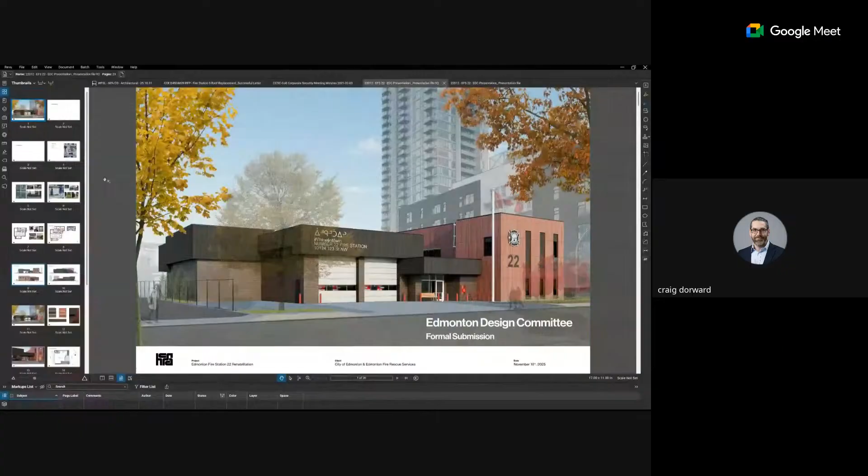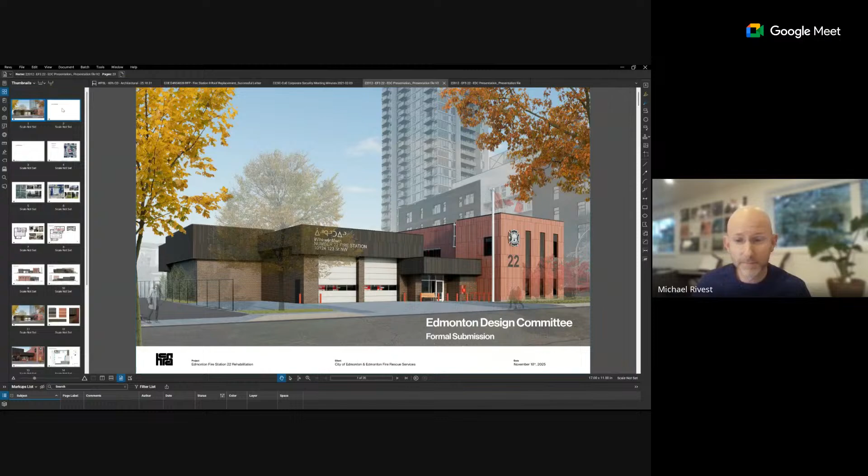Okay, I'm going to share my screen. Please let me know if you're able to see it. Yep, looks good. Is it okay — every time I go full screen, I'm just going to share it like this, if that's okay. Is it legible to everyone? Yeah, that works. Excellent. I'd like to start with the land acknowledgement.

Our project site is located in Treaty 6 territory, the traditional lands of diverse First Nations, including the Nehiyaw, the Dene, the Nakota Sioux, the Anishinaabe, and the Niisitapi, and within the Métis homelands of the North Saskatchewan River Territory. These lands have long been places of gathering, ceremony, and community for many nations. We strive to continue the legacy of stewardship that has fostered this land since time immemorial.

So we wanted to just pause for a second. We typically always try to provide two submissions to EDC, the informal and formal. In this case, due to the project scope, which I'll explain in more detail, we were so focused on the interior of the building, aligning the rehab of Fire Station 22 with meeting Edmonton Fire Rescue Services' current functional program, that we didn't have that many options for the building addition we're going to present. So we made a decision as a project team to bypass the non-mandatory informal submission and proceed to this formal submission. We feel it was appropriate in this instance and just wanted to recognize that.

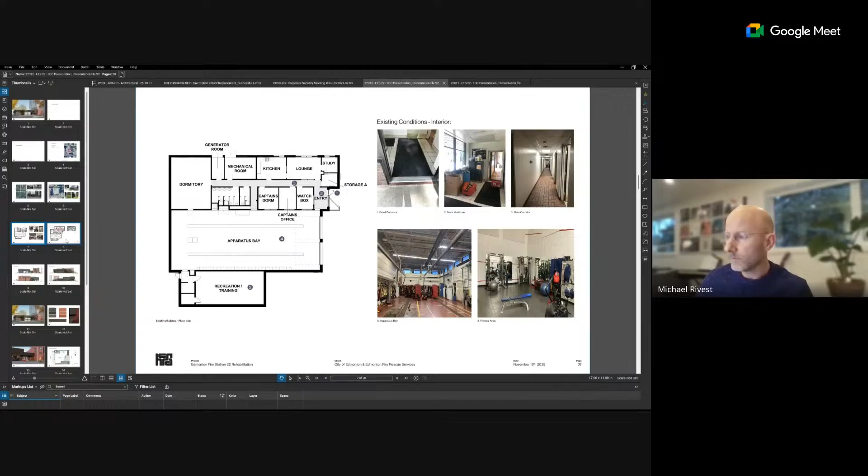So moving to the proposed changes, you can see the duty gear room, and we added a workshop off the apparatus bay to make it function better. The fitness area now has windows onto the outdoor amenity area, which you'll see in the landscape plan. There's an enlarged kitchen and day rooms to meet functional requirements, and a large locker room. One of the really important parts is clear circulation for efficient response times and direct lines of sight for firefighters leaving the core areas and getting into the apparatus bay. The second story component is the dormitories - individual dorm rooms and the captain's dorm room.

You can see our building addition, a 2-story addition on the north side of the site, with the existing building to the south of it. We're proposing fibreC panels on the building addition, as well as recladding the horizontal bands on the existing building. It's a material we felt would be durable and last for decades for the fire station, and also align nicely with the existing brick.

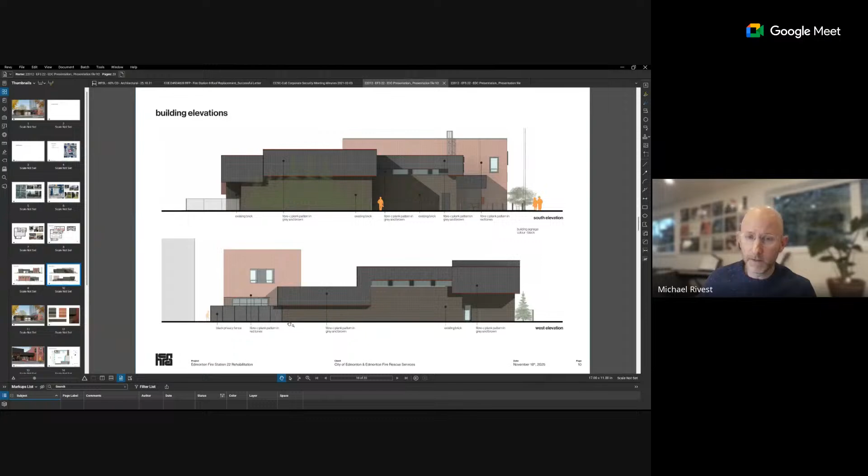We presented a few options to Edmonton Fire Rescue Services, and they really liked having a punch of color, especially red, as a traditional firefighting color. So we played with red tones on the building addition side, whereas we had a more muted approach on the existing building to tie into the existing brown brick.

One of the reasons we picked this fibreC material was it comes in slightly different tones and textures, which we enjoyed on the facade because we really didn't have many options to play with the massing, as this was a floor plan exercise of trying to find the most efficient layout. Playing with these different textures and tones gave a bit of variety on a pretty simple building massing.

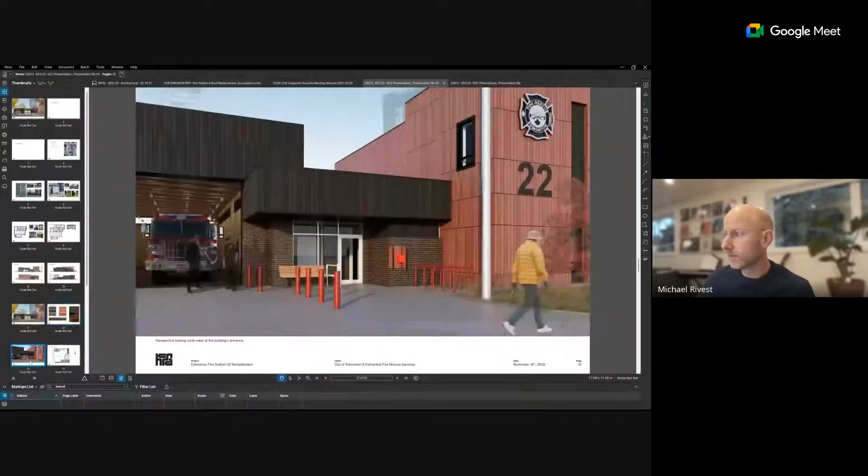Here's just a close-up where you can see some of the 3 different textures and tones on the reds, as well as the 2 grays and 1 brown, with the browns tying into the brown brick.

I'll take us through this landscape and site plan, and then I'll ask Jacob to take us through the planting plan. Starting at the northwest corner of the site, there is the firefighter private amenity area. They have a covered area off of the kitchen where they can barbecue and hang out.

We're still designing this, but the idea is that they would have some privacy from the views to the north, because there's a 7-story residential building getting built there, and the firefighters need peace and quiet when they're in their outdoor amenity area.

The existing shed that they use for their lawnmower and other outdoor supplies, the existing parking that they use for their passenger vehicles, as well as the existing waste enclosure, with proposed planting on the south.

The firefighters do use this area in the southeast corner for parking. The tarmac has to be maintained free of obstacles to ensure efficient response time. The main entry is where we're providing a bench and some bicycle parking.

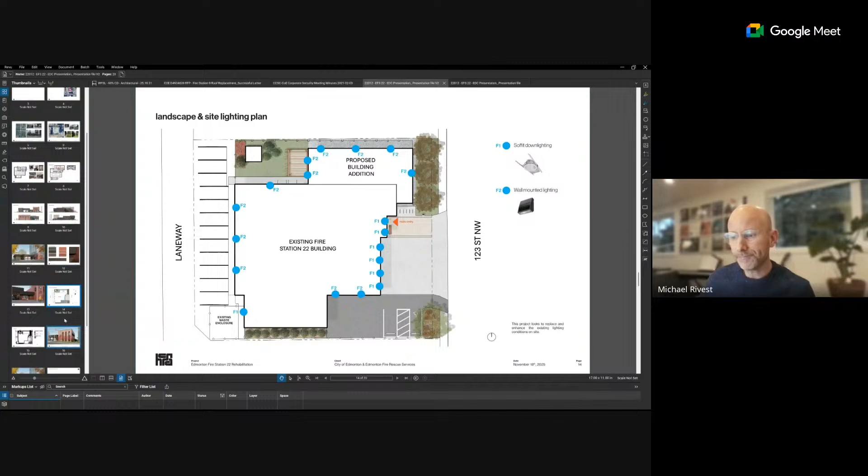Jacob, maybe I'll let you take us through the planting plan.

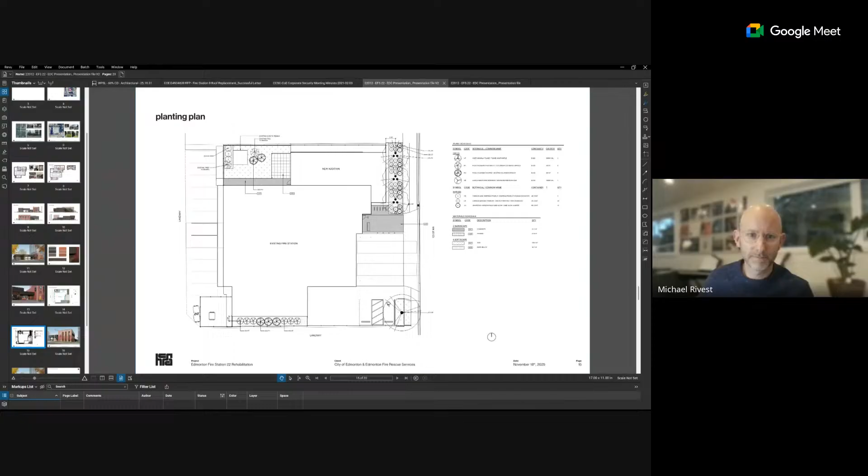With a planting plan, there's always a balance of what's required by the bylaws and also creating visual interest, while doing it in a way that needs reduced maintenance. At the front end, we've got a few maple trees that are hardy and will turn a great red color in the fall. In the back amenity area, there are 2 big coniferous trees that we're maintaining, and we're adding a couple more to increase that privacy buffer we're looking for.

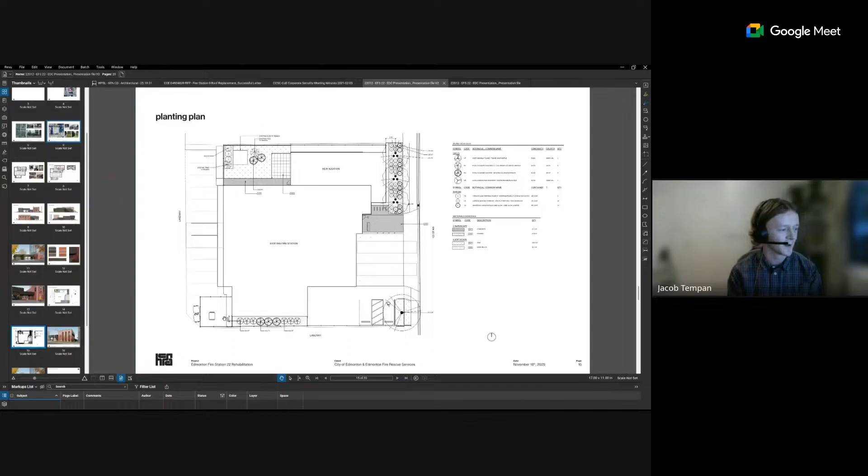On the south face of the building, there are 9 coniferous trees. We're required 15 trees for this development, and this is maybe one of the last places we could put them, so we chose small coniferous trees that won't interfere with the building. Then on the southeast corner, there's a large elm tree, classic Edmonton tree planting, that'll create nice shade along the sidewalk.

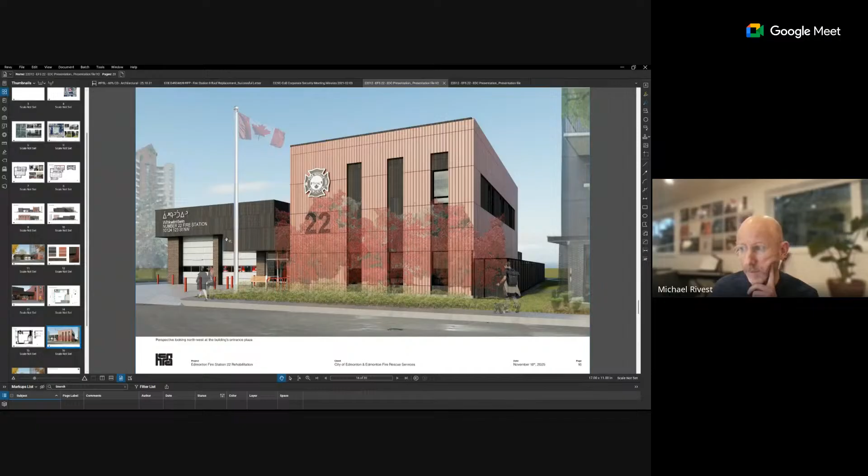Thank you, Jacob. This was just a view from the southeast, looking towards that building addition with the existing building in the background. And that concludes our presentation.

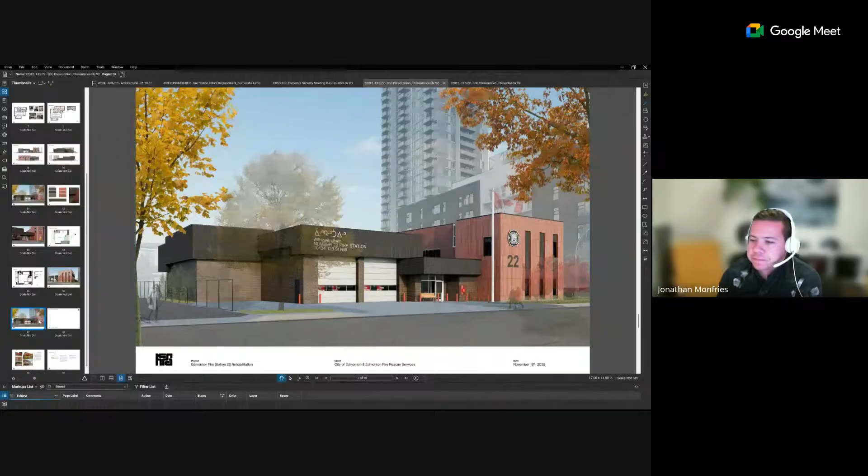Hi, Michael and team. Thanks for your presentation. Similar to Jonathan's comment, I do appreciate the red tone fiber cement color palette. I do think it adds that landmarking presence. I also love how those fibreC panels add another textural element that complements the existing brick. It's something that may not have been achieved if you had used a different durable material like metal panel.

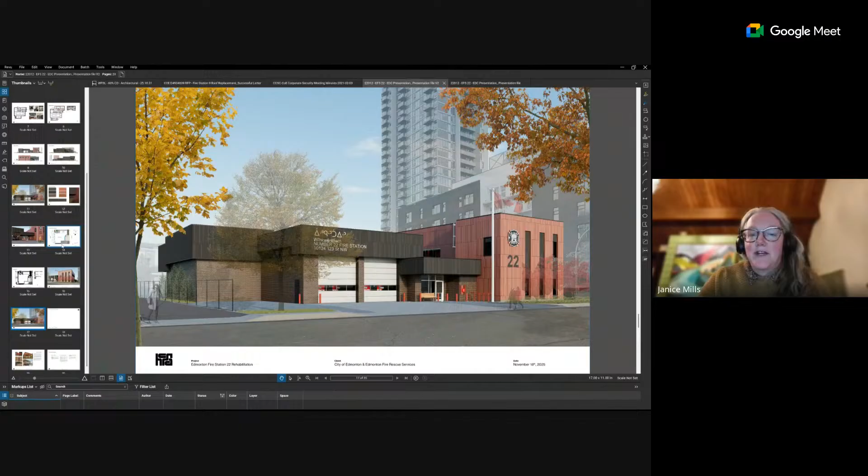One small item that I'd like to put forward for consideration is looking at the overall landscape plan. The accessible parking stall is located adjacent to the curb and softscape area. I would recommend either moving it to the interior stall to allow for improved accessibility on both sides of a vehicle, or providing a clear area on both sides of the vehicle, because there appears to be ample room. Looking at the existing overall site plan, it looks like there was parking adjacent the other direction against the brick wall. I'll leave it to my fellow committee members to comment on whether that empty area in front of that brick wall could potentially be better utilized for softscaping.

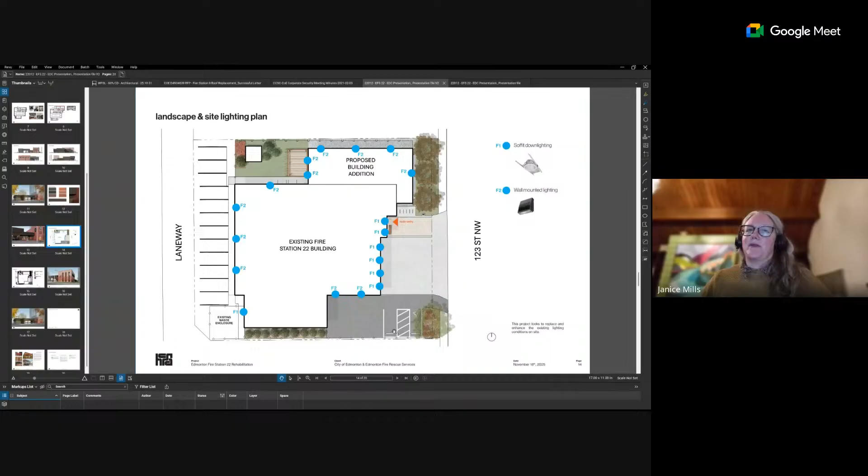So once again, thanks. And sorry, just to clarify, the accessibility, were you trying to get it closer to the entrance? I was just shifting it - either putting the accessible stall to be the interior side stall, or just having room on both sides of the vehicle, or even shifting it down and providing access on both sides. Typically you don't have enough room to do that on a site, and you only provide access on one side, but being you have ample room there, it'd be nice to give the accessible stall the room it deserves. Okay, yeah, fair comments.

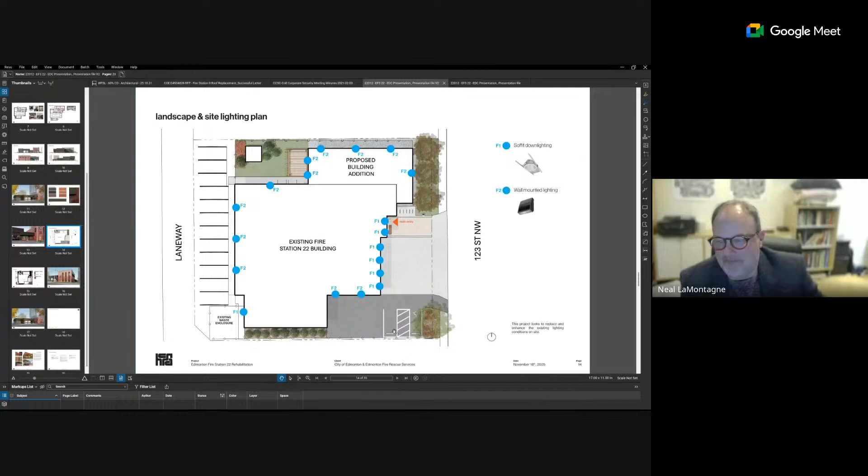Hello Michael and team, thank you for the presentation. The building looks beautiful, I really appreciate how it looks. I only have a few questions, but no nagging issues.

The one question I have is on the south side where you have the barrier-free parking. I don't know whether it still exists - there was a tree to the south of the building according to Google Maps. The asphalt area south of the fire truck apparatus bay and east of the storage area, is there an intended use for all that asphalt? It was there existing - are they planning on parking there, moving a basketball hoop there, or is there a program for that space?

Parking is a premium being a downtown site, so there is often parking used in those locations. It just gives the firefighters a bit of flexibility having that space open.

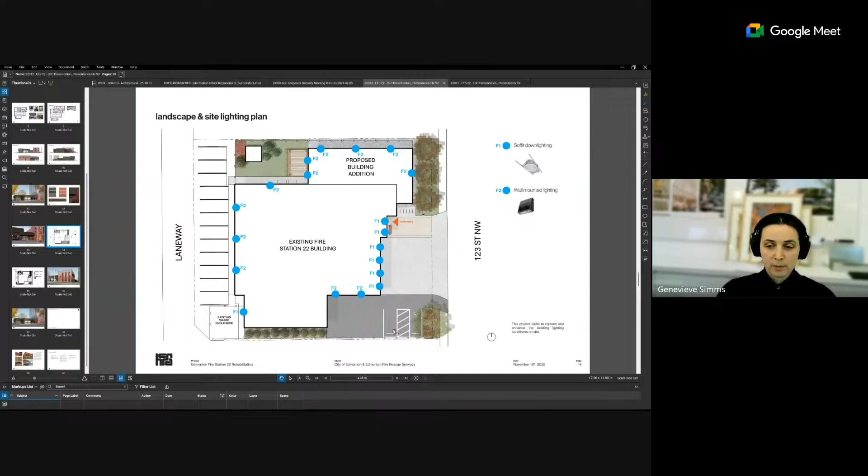Okay, and so the tree is being removed, or is it gone already? Genevieve, I might need to ask you that. Yeah, I can answer that - there was a tree assessment done during our schematic design phase, and the arborist recommended that tree be taken out. It has not yet been taken out; that will only happen after we have an approved development permit application, as per our proposed planting plan.

Okay perfect. The only other question, not a sticking point by any means, is about the window placement or window design strategy for the second floor and the red component of the building. You've got these gorgeous vertical indents with darker fiber cement panels on the east side. Is there any reason that approach wasn't taken for that south side - I think that's the captain's dorm - or on the west side?

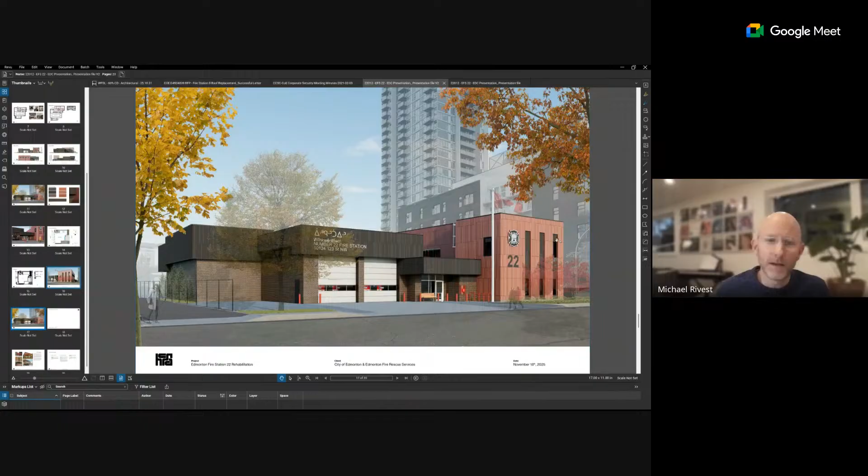So we purposely aligned the east windows. When we were playing with different facade studies, we liked how we were combining them with these darker elements, connecting to the existing building and its dark tones. We're actually adding one more window here to unify that. When we added the one window from the captain's dorm onto the tarmac, we just personally liked it as a single punch. However, we've played with those dark bands - you can see it a bit on the north elevation where we're combining all of the dorm rooms into a single element.

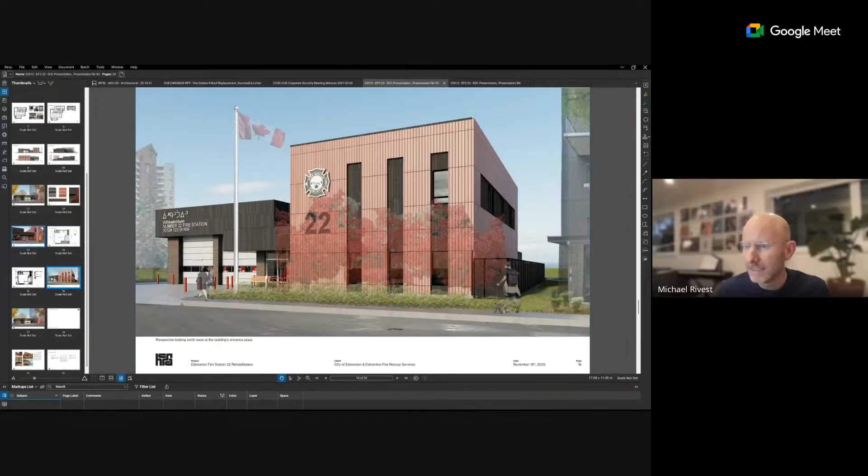Does that answer your question? Yeah, it answers my question - so you've thought about it and made a decision. Yeah, we like one window on its own on the south. Fair enough, thank you for your presentation. That's it, no further comments. Thanks, Greg.

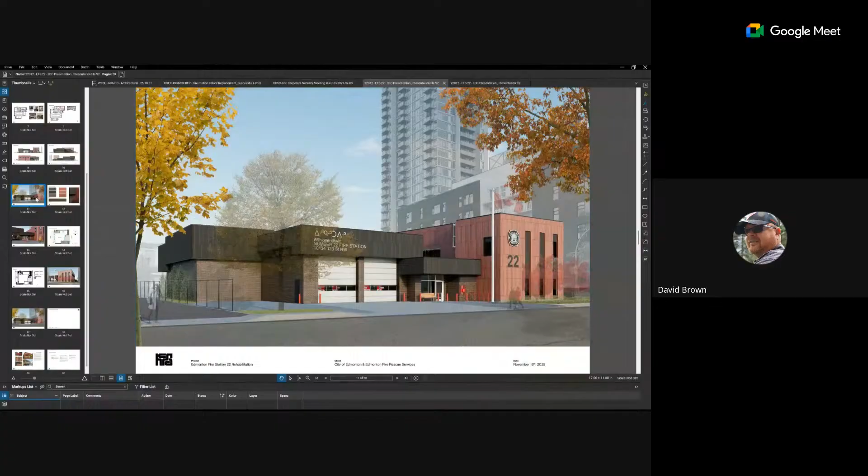I know Janice was talking about that east existing brick facade - for that, was there ever any consideration for maybe a piece of public art on that wall?

We didn't talk public art. A mural came up at one point, and it was decided that wasn't the best use of the project funds.

We did look at signage there. So we have the logo and 22 on the addition here, and we really liked highlighting the new build, the new addition for that. And we were talking about parking earlier.

There are often cars here, so we also didn't want to be like hiding something over there. Mitchel might have a bit more to add to this.

I was just going to speak to that little space there from the previous comment too. Obviously we don't have secured parking in the back of the facility, which is off a pretty busy, high traffic alley. So our members do like to take advantage of these stalls here, especially in the evening and during the day. Especially if we have our ladder truck being serviced, the ramp is quite short, so we can't actually do any ladder checks on that ramp. So they actually like to kind of tuck in there.

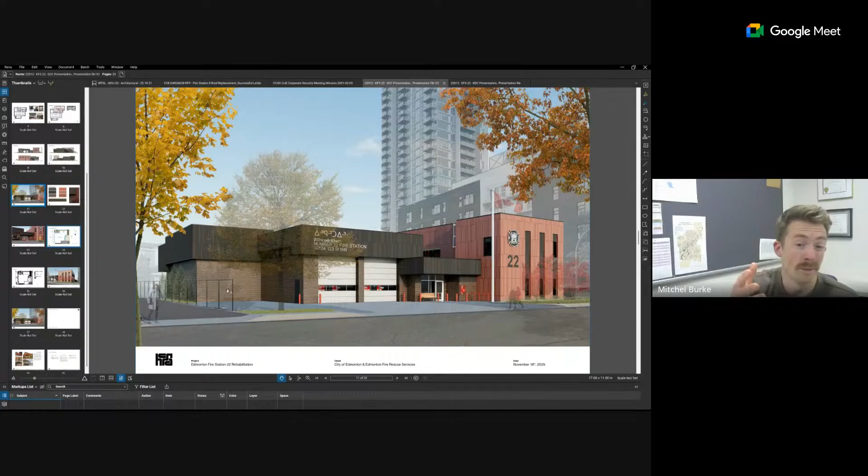So there's a lot of traffic, and it usually blocks the view. It's pretty obscured in there. It's kind of unfortunate because that is sort of a remnant brick wall piece which has no articulation to it and is kind of bland.

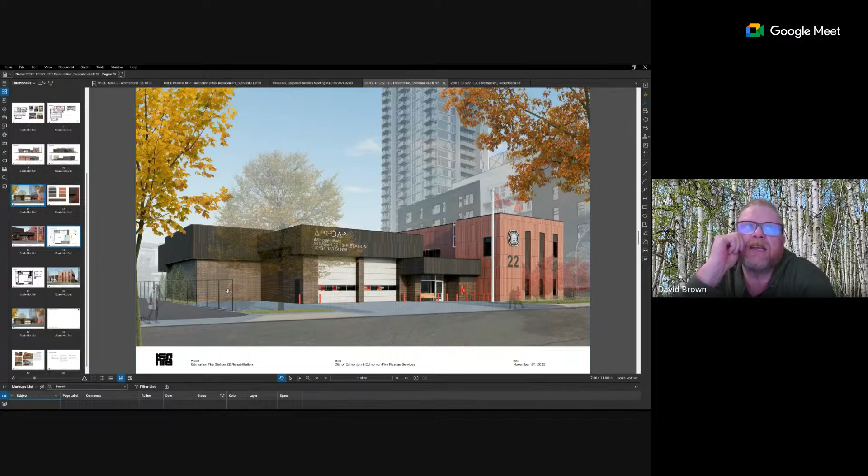The other question I had: any consideration for maybe extending seating, such as a seat wall, maybe incorporating some planters, west to east along the main entrance, rather than using bollards to provide a bit of separation between the main entry and the apparatus bays?

That wasn't brought up. We did provide the bench. That's a standard in Edmonton Fire Rescue Services functional program. And in the reviews, it wasn't flagged that there was a need for more seating off the tarmac.

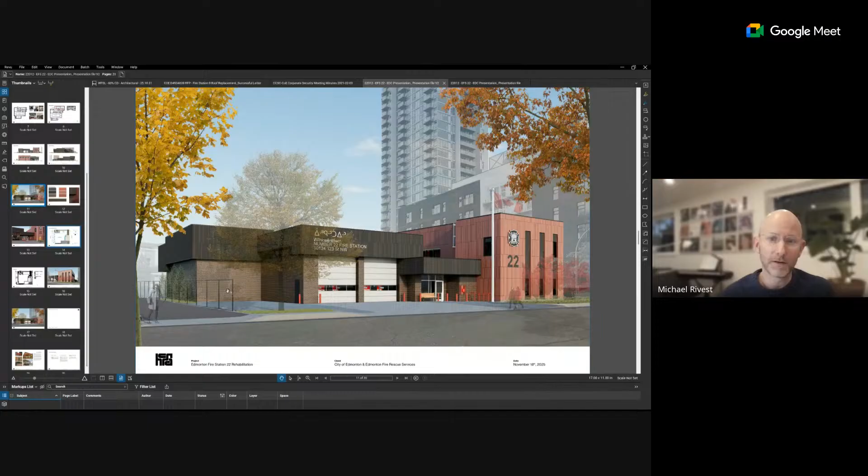I think it might have, rather than just sort of going with that single bench, as I said, it just would have provided a bit more definition to the main entry.

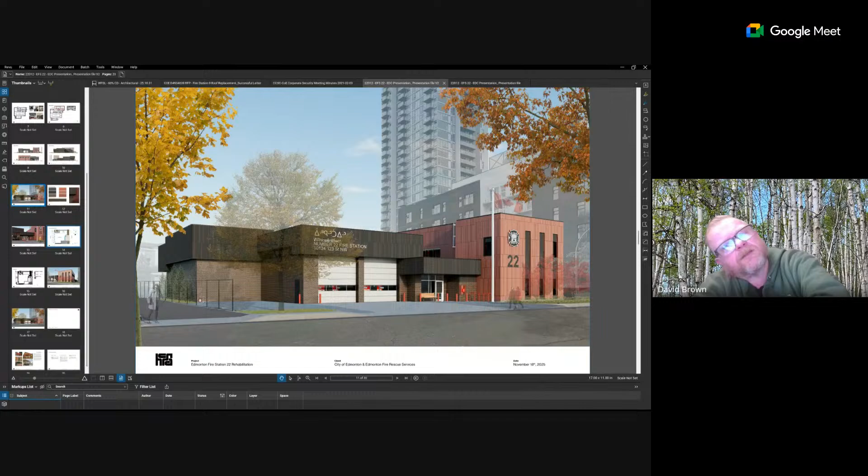Then the other question I had was regarding the outdoor amenity space, which seems to be in a very consistently shady spot. And I know that you mentioned during the presentation that it's still sort of being worked out a little bit, which I appreciate. But I do wonder what aspects of form and function are being considered for that, or were considered for that space.

With respect to the extent and type of hard surface area, or retaining existing trees and proposed planting additions, the size and extent of the shelter, maintaining sod. And the other strange thing was maintaining that existing shed, which really isn't, from what I could see, aesthetically consistent with the architectural upgrades that are being done to the fire hall.

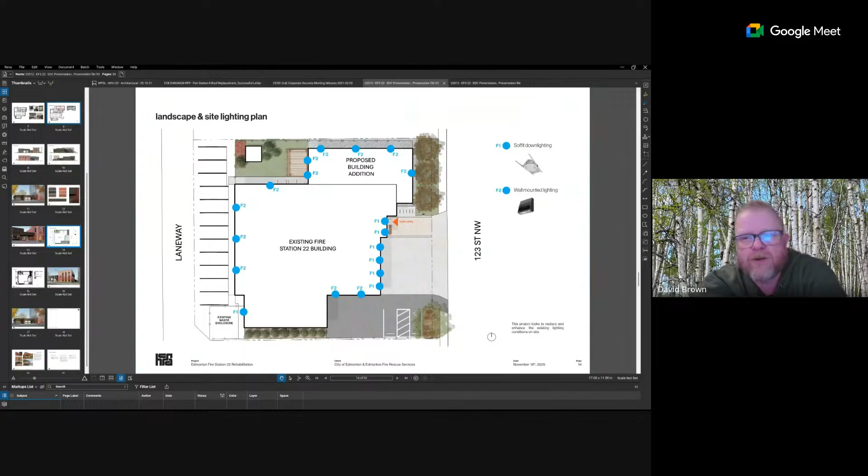So I'm just wondering how form and function is being applied into the design of that space.

Well, as I mentioned in the beginning, the driver for this was the interior floor plan. Tied to that was definitely the recognition that a few key programs need connections to the outdoors, and that's the fitness, especially the fitness and the kitchen area. So that's the reason why these are the two programs facing this outdoor amenity area. And it really led to this footprint of available space for outdoor amenity area.

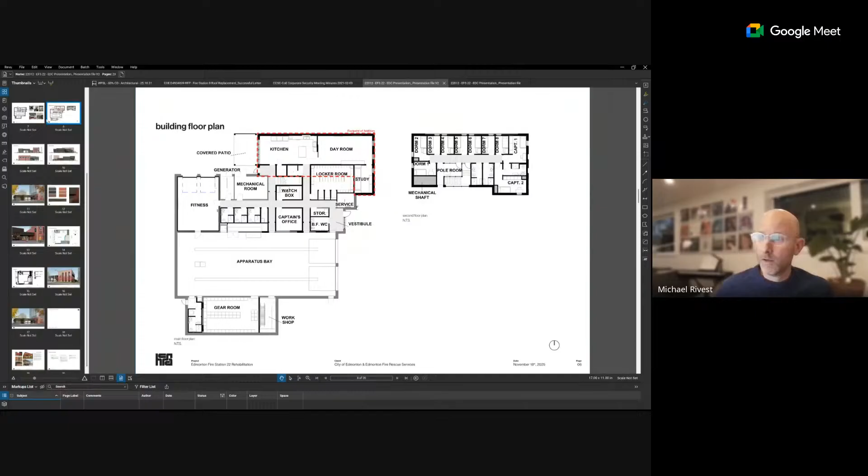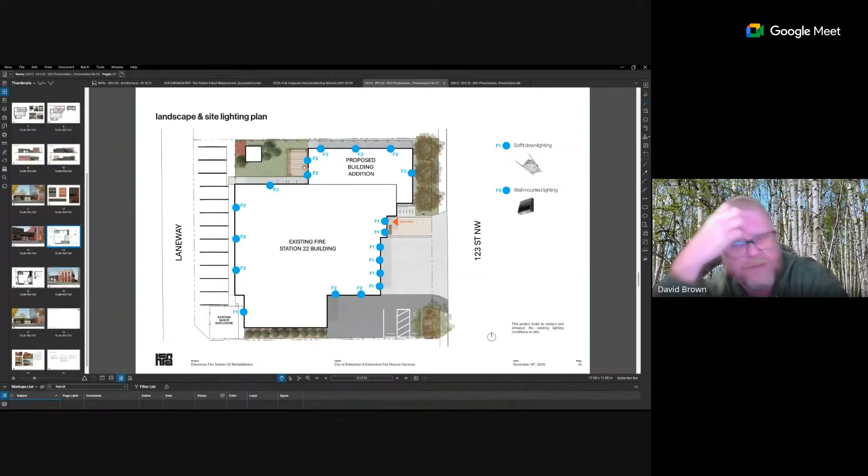I guess where I'm coming from is, if you're extending the kitchen into a sort of an outdoor kitchen space and gathering space, I'm not too sure how many people are in the building at one point in time, what constitutes the number of people that would be in the fire hall at one point in time. But the shelter and the hard surface area seems undersized for creating opportunities for expansion of the kitchen and gathering, and that fitness area as well, and just the extent of grass and the shed.

So I was just trying to get a better understanding of whether a real hard look at the form and function of that space has been completed.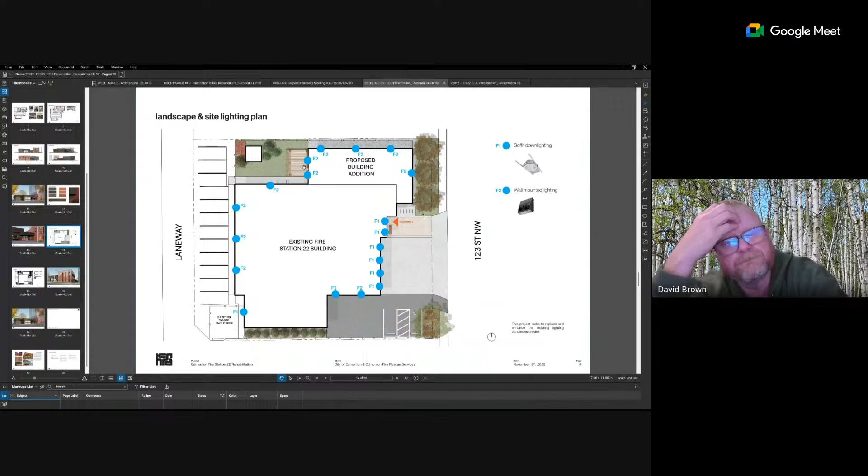Eugene, you put your hand up. Yeah, I just thought it might be helpful to clarify the use of that space. I think it's deceiving maybe to call it an amenity space. It's more of a barbecue area and just a chance to get some fresh air. We're not really anticipating people lounging or hanging out there.

It's just basically access to a barbecue, and we wanted to provide some privacy so that the residents nearby aren't looking down onto it. But that's really the function of it. It's not so much an amenity space. And it's an improvement from what we have now, where we have to go from our kitchen through a hallway, through a mechanical room, through a door to barbecue and back around. So this is actually quite an improvement.

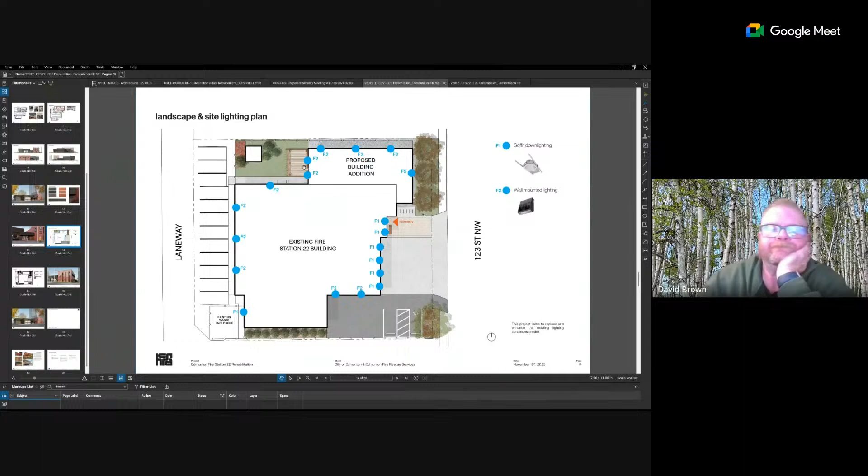Okay, thanks. Thank you, David. Kevin. Sure. Thank you for your presentation, Michael. It's nice to see you and the team.

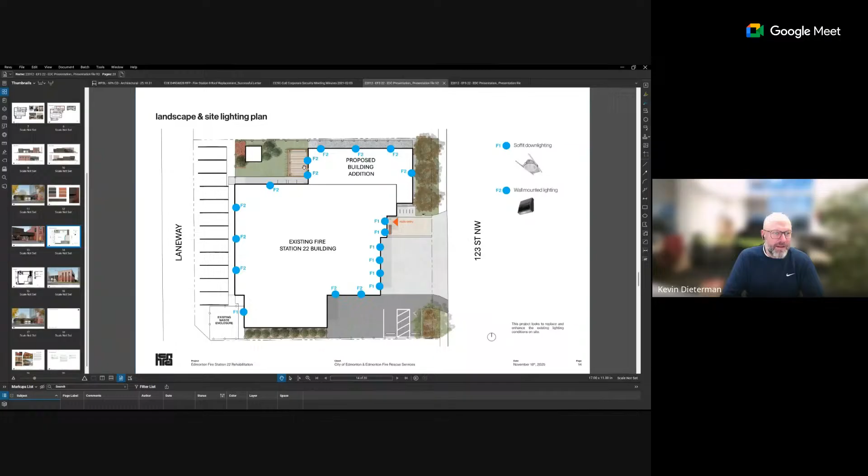I don't think I have any comments that weren't already made. I think it's a lovely addition and obviously an important project for the city and for fire and rescue. So thanks for bringing it. Thanks, Kevin, and nice to see you too. Thank you. Raj.

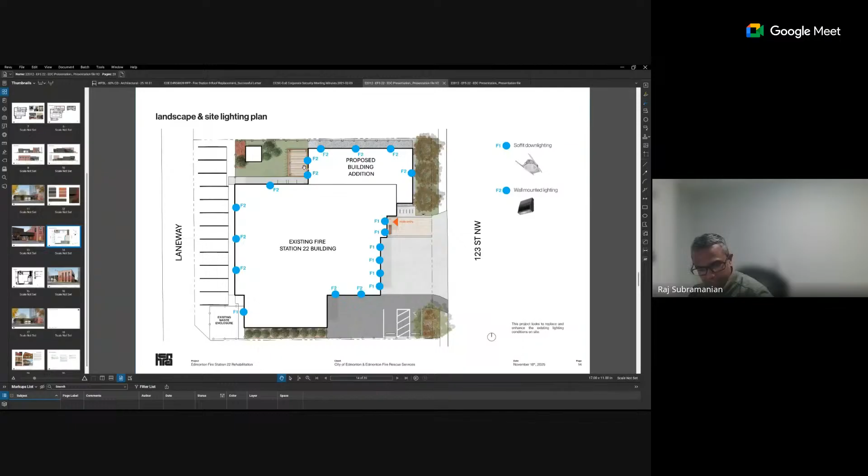No, I don't have any additional comments. I really appreciate the concept here of making use of the existing building and modernizing using the existing footprint. So great work, thank you.

Thank you, that leaves myself. Overall, I have no major comments. I think the material choices on the project are great. I will echo David's comment about the seat wall or kind of planter. I believe there was a small planter there before, if Google Street Maps is correct. That would just be a nice, softer kind of intervention than the bollards.

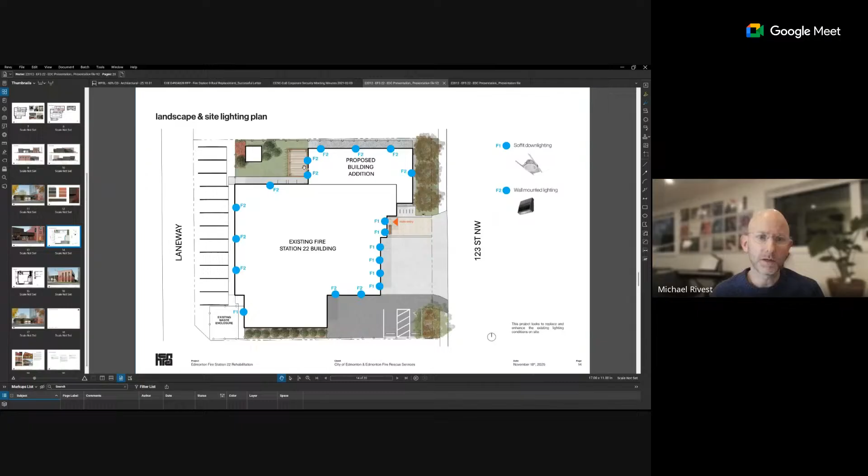I did have two kind of really nitpicky questions. The privacy fence, what are the details or the construction of it? So we've been looking at an Omega fence. Budget is a concern, as is on every project these days. So we're trying to find a cost-effective fence that has a high profile, that isn't easily seen through, so that there's some privacy for those ground level windows.

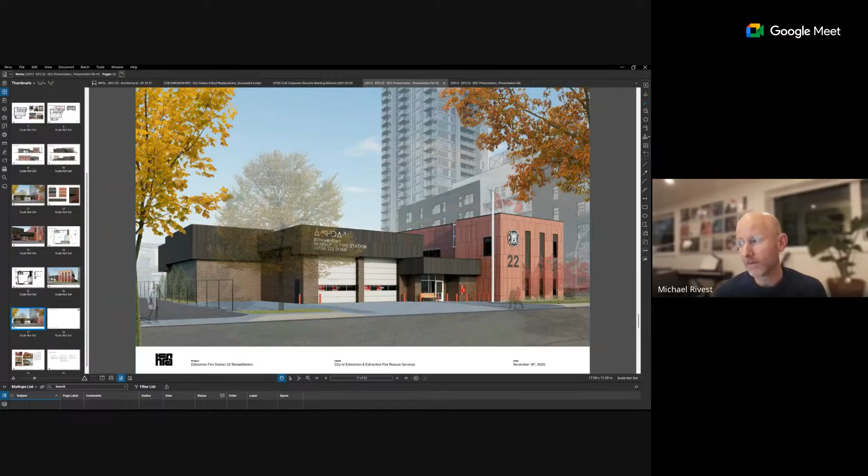And then the other small thing is the signage. I really do appreciate the syllabics included, and the Wîhkwêntôwin community name. Was there any thought to why it wasn't placed above the door at its current location? Well, I think we're still playing with signage, to be completely honest. It was, in this instance, just a large, what we felt was a kind of central area for the signage. It may be that a version of this is placed over the apparatus doors, also over the entrance door.

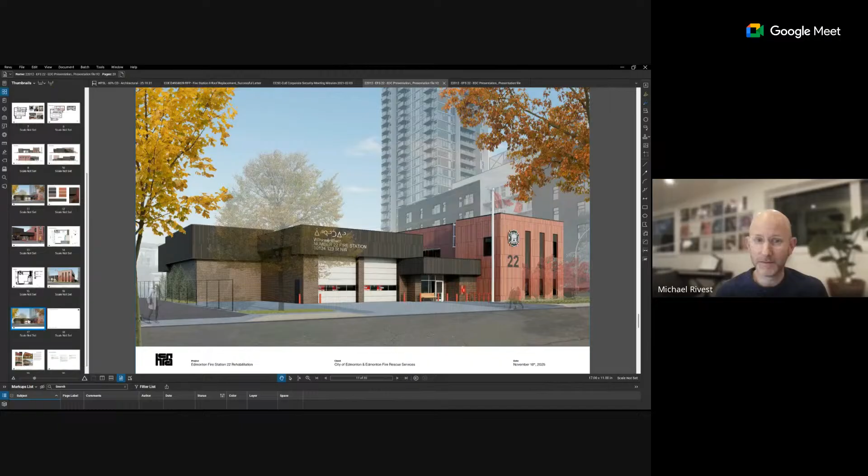I guess we don't want to scatter it all across the project, but it's a good comment and we'll take it into consideration. Just a thought. I really do appreciate the branding of the FRS logo and the 22 on the new addition. But overall, yeah, great.

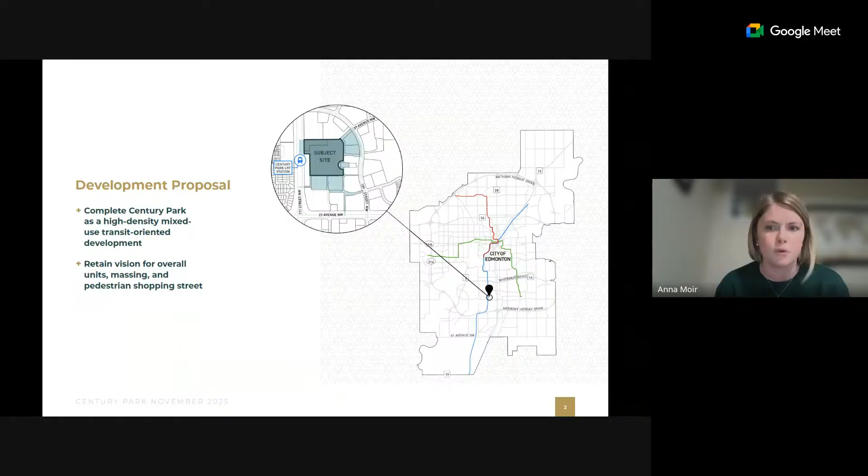The application is consistent with the vision of Century Park as a high-density, mixed-use, transit-oriented development, while we've been exploring the most effective regulatory tools to implement this vision. Following the closure of Heritage Mall, this site was rezoned to DC2 in 2005 to accommodate a mix of uses. A subsequent rezoning to a new DC2 in 2013 implemented a new transit-oriented vision for the site, and at that time excluded the developed portions along 23rd Avenue and 109th Street. So this current rezoning looks to provide new zoning direction for the remaining undeveloped portions of this site while considering the legacy of DC2 zoning that has guided development to date and the community's existing vision for this site.

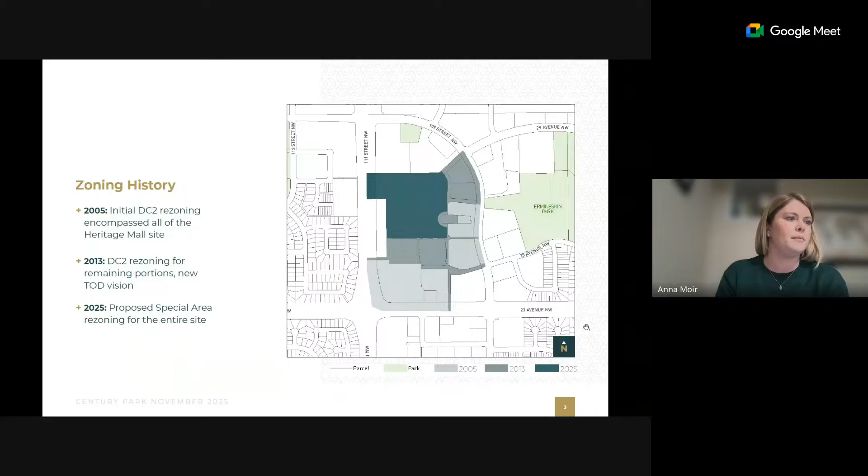The Century Park site is located at the south terminus of the Capital LRT line, which is currently under construction to extend to Heritage Valley. This transit station provides LRT and bus connections to numerous education, health, and employment nodes within the city. This site is a critical location for high density that supports transit ridership and provides residents with enhanced mobility choices. Despite this, development of the site has been slow to progress over the past 20 years since that initial DC2 zoning.

The center of the site remains undeveloped, immediately adjacent to the transit center. The surrounding private roads are partially constructed, and this gap between the existing neighborhood and these high-density residential areas and the transit center itself is currently disrupting the experience of the site, the transit center, and the community as a whole.

In our informal presentation, we focused on the use of the city's new standard MU zone as a solution to the challenges faced by the current DC2 zoning. These challenges were that the DC2 creates a complicated development permit process due to the prescriptive nature of the zoning and the inability to apply for typical variances as needed. DC2s are intended to implement a very specific vision for a site, and with changing market demands, changing standard building design regulations and city policies, and changing ownership, the DC2 is no longer the right fit.

So MU zoning provided a solution as the intended building design regulations aligned with the intent for the site. However, the MU zone does not consider a large site in the interpretations of regulations for setbacks, FAR, and others. Further, administration expressed some concerns with the implementation of a private road network and a phased implementation process without zoning direction.

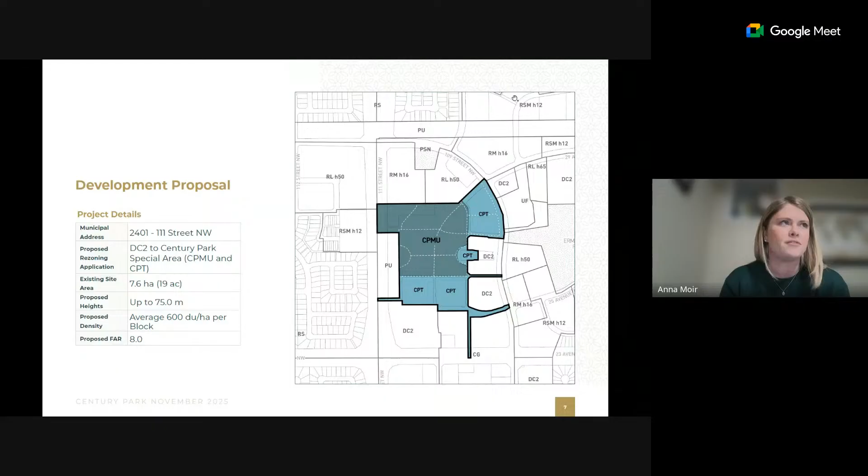Thanks, Anna. So since 2021, me and my team have been guiding the urban design of this site and the evolution of the plan. As you know, this has been in progress for quite a while. The blocks are more or less established, and it's always been our aim to create a vision that's connected to the community, a diversity of housing, and really creating a density appropriate to a transit-oriented site with towers sensitively integrated into the site.

We also recognize that the trade-off is to have a vibrant and exceptional public realm. So really what we've been doing over the course of the past few months is drilling down on the details and ensuring that we have that exceptional public space to complement the density.

The conceptual site plan: we have 6.92 hectares of developable area, approximately 2,500 units, which exceeds the minimum density of the current DC2. We've looked at 10 to 12 towers up to 75 meters in height, about 2.5 million square feet of residential, 130,000 square feet of commercial integrated in a mixed use form, and we're looking at an east-west pedestrian-oriented shopping street, which has been envisioned from the beginning.

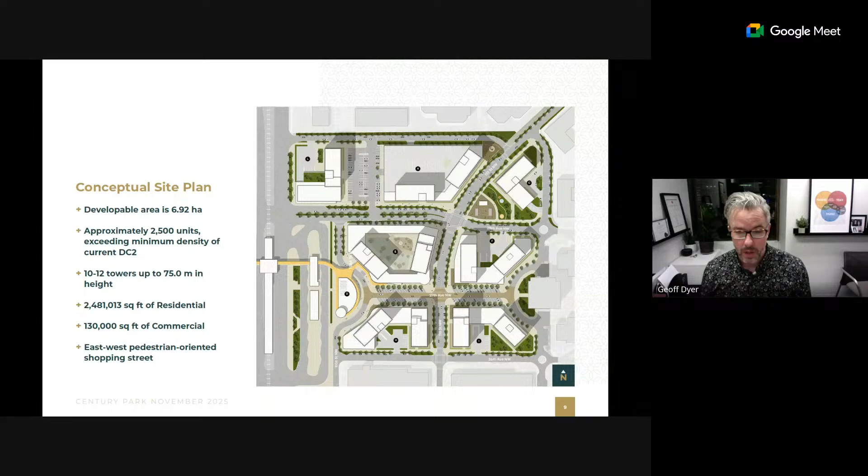Again, we've been really honing in and dialing in on the vision of how that works. The built form and massing sensitively integrates the density, understanding that we need towers to reach the thresholds we see as appropriate for the site, but looking at how to create an environment with that exceptional public realm. Here you're seeing the commercial on the bottom, the residential towers, and then the podiums that are integrated with that.

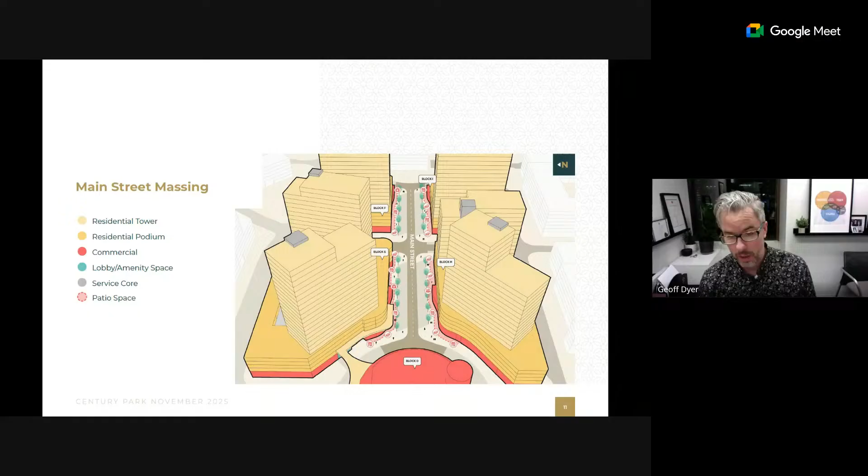It is noted that we did do quite a bit of detail. These are challenging blocks in terms of their dimensions, so we had to really understand how the building cores worked with the underground parking, the entrances, how we could ensure that the main street wasn't interrupted by the servicing, and that we could have servicing that actually works with the commercial and the residential uses. So it was really a deep dive into how the buildings work on each block.

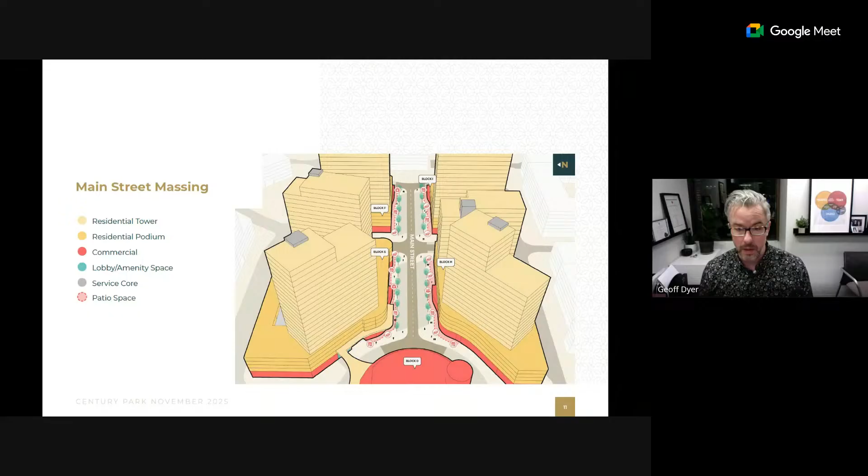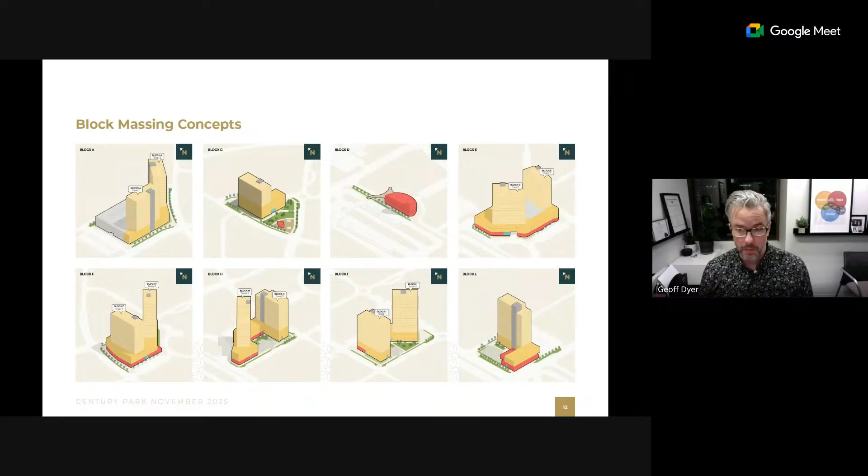So here you're seeing the block by block analysis, where we really honed in on the details of these, how they work, how they match the zone, the land use districts, how they meet the requirements of the public realm, and how they integrate with the surrounding uses.

We paid attention to shadows. There was an effort to create what we believe is an exceptional public space amenity. It's not where it originally was located, near the transit station, though we're absolutely committed to creating an exceptional public realm there. But we found a triangle in the northeast sector that we were able to free up from shadow, and really study the shadows, looking at the details of how towers were positioned relative to each other and considering the sun angles at different times of the year.

Public realm interface was extremely important. I know we had some comments from our previous application. We have always been committed to having a sufficient sidewalk. We wanted to give the buildings the ability to have an interface with the sidewalk, given that there is some grade on the site. We have some great examples that we've worked off of, measuring, going to actual built places, measuring things, seeing what works, what doesn't work.

The commercial frontages are really designed to support these vibrant, high activity environments. Our center street includes a 3 meter pedestrian walkway, plus a furnishing zone, and then a variable setback for dealing with grade and the building interface. The furnishing zone will include boulevard trees, planters, benches, garbage receptacles, and other furnishings for the site.

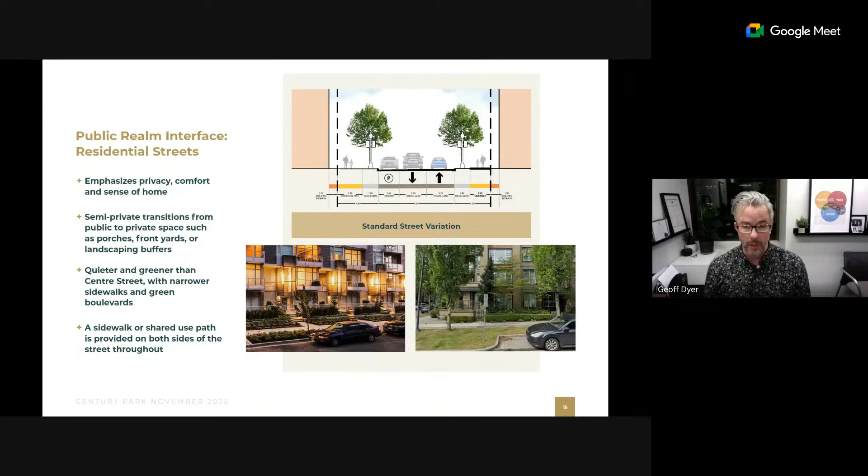Public realm treatment, we were asked to look at this in more depth, and this is accommodated by an extensive document looking at the public realm. Sidewalks are sized to support the pedestrian volumes. Street trees and landscaping buffer the sidewalks from vehicle traffic. And the street furniture is contemplated to be of a contemporary aesthetic, with a unified vision for the site as we move forward.

Unique lighting and lampposts can be provided due to it being a private road network. Signage, including band and projecting signs, are to be consistent within this Century Park identity. And then we're looking for opportunities for public art throughout the site that could include sculptures or illuminated art installations.

Here's one of the renderings. We did not focus on the architecture. We're leaving that to an architectural process that will be tied into the larger vision, but we wanted to illustrate a possible outcome for the public realm and the attention to detail as we move forward on that.

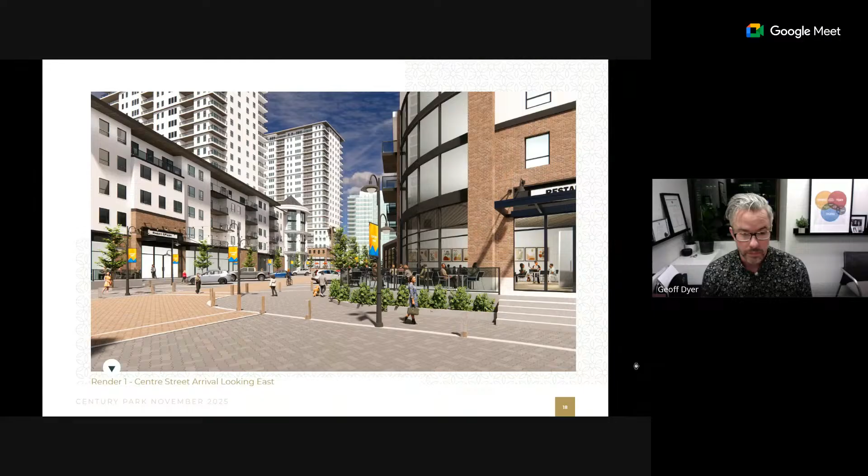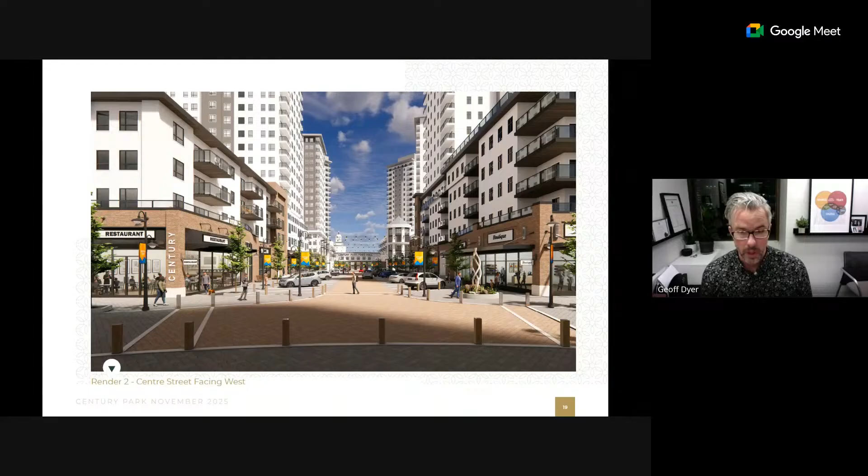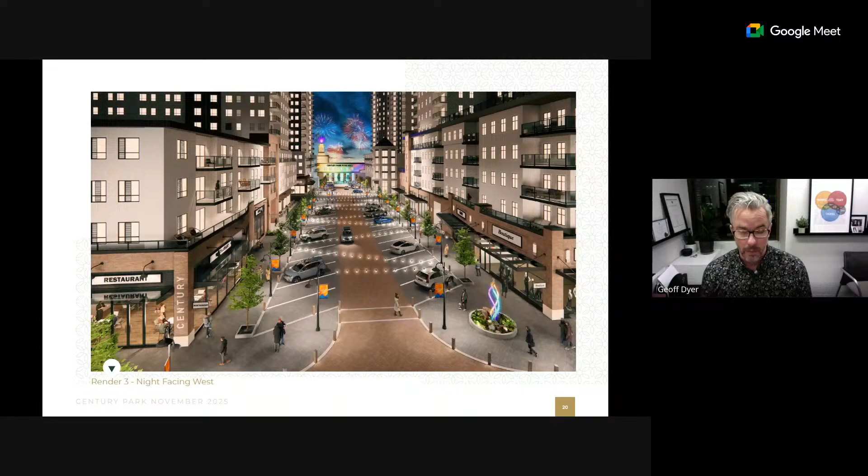Here we are looking towards the west. This would be towards the train station, with our potential amenity building that could have a food hall and other amenities in it, creating a strong connection to the transit facilities to the west. Here's a nighttime view, really concentrating on the nightlife, creating vibrancy throughout the day and throughout the 4 seasons.

So I'll jump back in here. Thank you, Geoff. So looking at preliminary phasing for the site, development's going to start in the north and progress south, with our anticipated first phase 1 development permit to be submitted in spring 2026, really moving into that first phase in the north portion of the site. Sub-phases might be identified through future development permits as we go.

So to bring this all together, the proposed rezoning to a special area is a result of our continued collaboration with city administration to find the appropriate mechanism that can shape these remaining portions of Century Park in alignment with overall city policy direction and the vision for the site. We believe that this zoning achieves a balance of the current site-specific DC2 direction that gives assurance to city administration and the community, while also bringing in the more generalized MU development regulations that shape the development of each block in alignment with the city's overall regulations.

Future buildings will be brought to EDC for review through the development permit process to confirm alignment with this zoning and city policies as well. So with that, thank you all for your time, and our team is available if you have any questions.